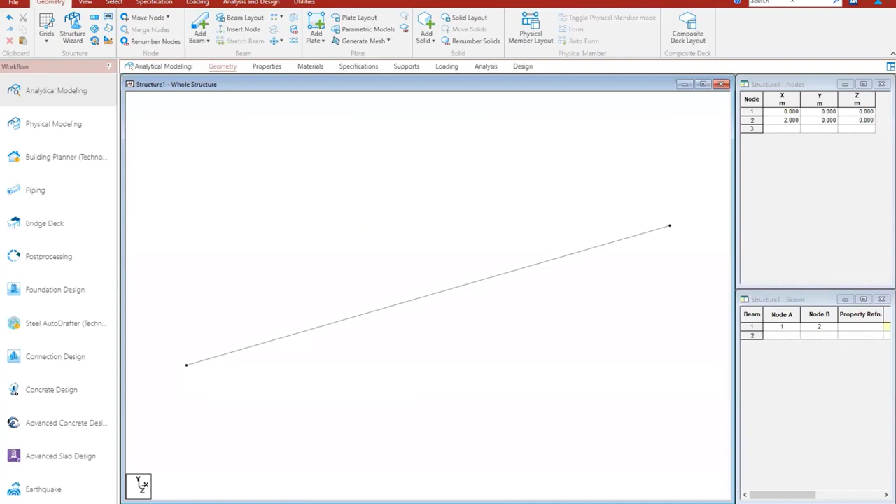Once you have the nodes, then you can add a beam. It's quite interactive. Just hover through it, find out what exactly are the functions available. You should be able to do most of the things just by seeing. If not, there is also a help section available and you can use that. So I added a beam. My geometry is almost done. I don't need anything more here. It's just a beam design. One thing I wanted to do with STAAD Editor is make it plane because I'm not working in 3-dimensional.

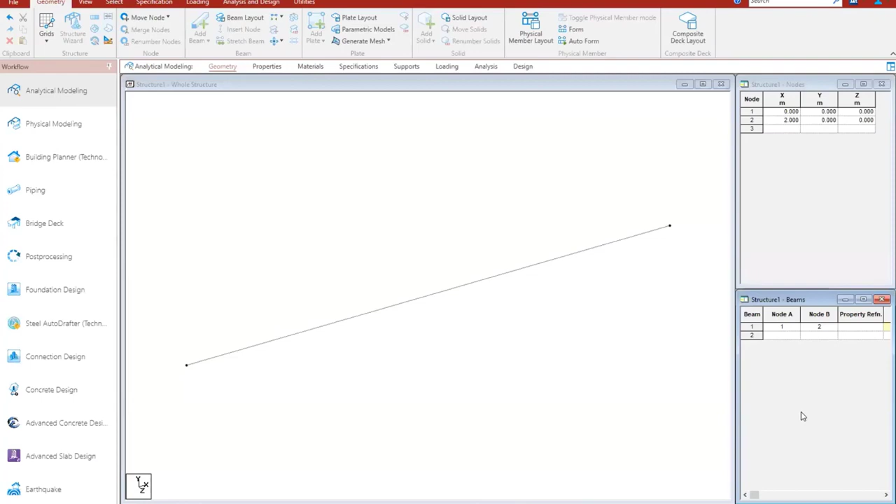Okay, then I go to the properties. Properties, I can take the section database. Say I take a British section UC beam. I'll take the bigger one for now. I can pick the material from here. Okay, so I'm defining the beam section. You can also view the table. It's opening on my other screen, I'll drag it here. You have all the properties available. You can pick from here.

Obviously you have a little bit of concept design with you. If so, you can pick from there. You can pick what kind of B by D you are looking at, and depending on that you can pick the section. I'm just picking one random section and add and close.

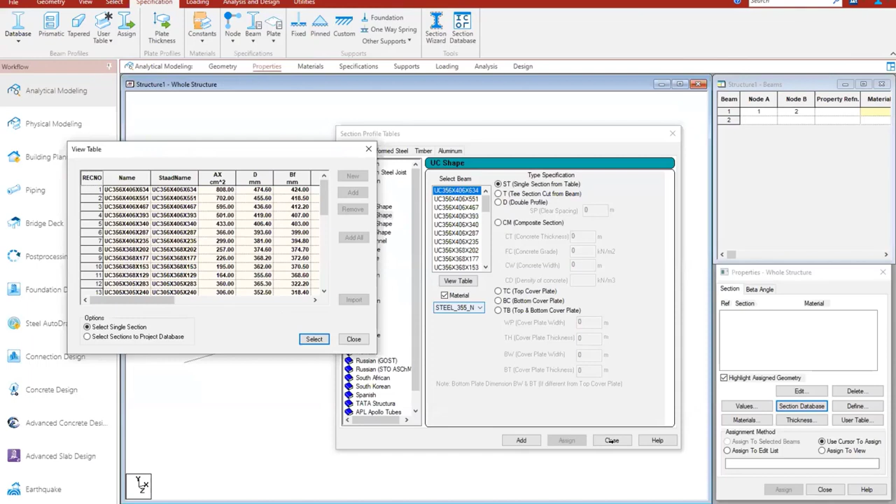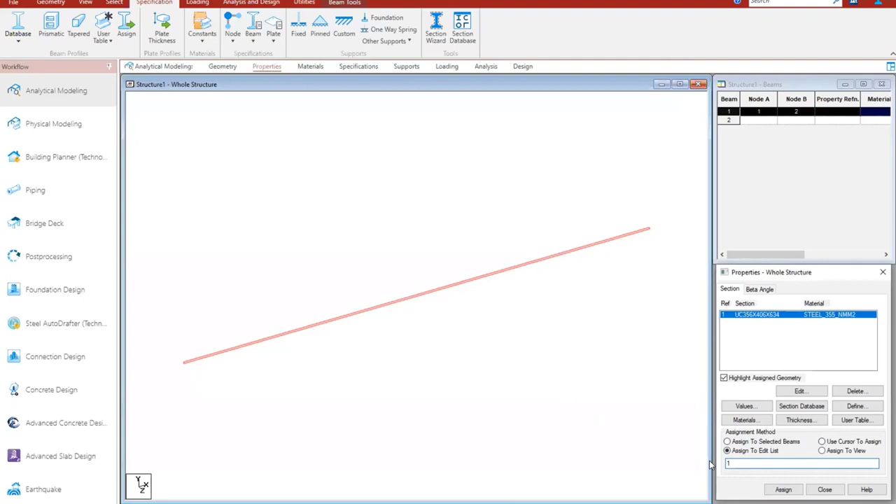Once I pick the section, I have to assign it. So there are a lot of options available to assign. One is assign to selected beam. So if I click here, simple click, it selects the beam. I can assign it to the selected beam. That is one way, or I can use the cursor to assign. Or to edit list, obviously this is beam number 1. I can just write 1 and enter and it will assign. Or I can assign it to view simply. I'll go with assign to selected beams. Yes. So properties is done.

Materials, we saw the materials coming there. If you want to edit or add some other material in it, you can do that. One thing to know is, although STAAD does allow for wood, it has this wood option here somewhere if I'm not wrong, but you cannot do design of wood using STAAD without defining the orthotropic 2D properties, because it doesn't consider wood as an isotropic material essentially.

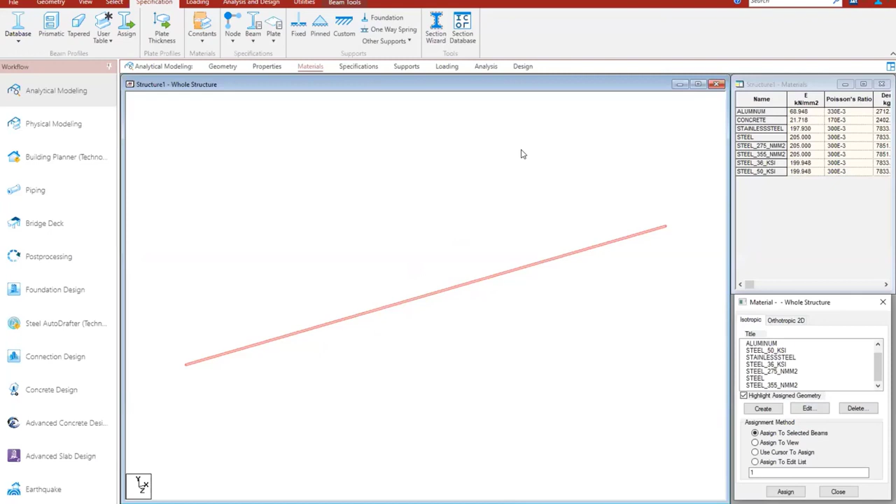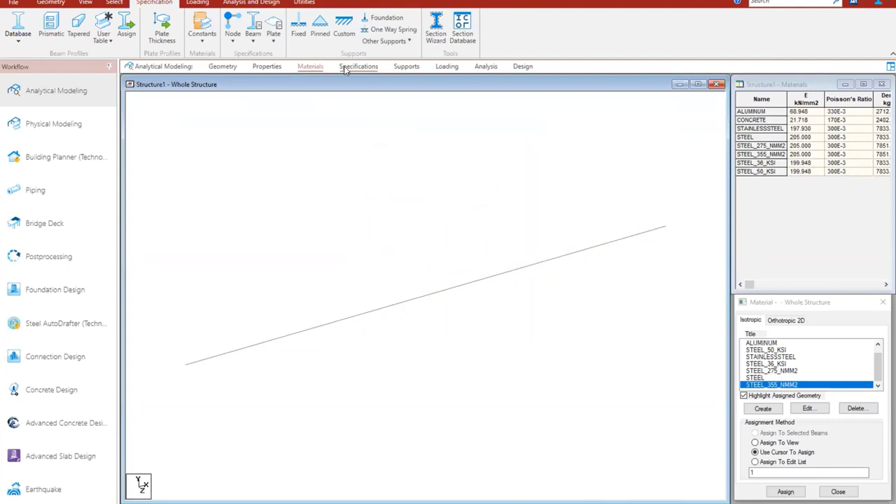Once you define the materials, you go to specification. Specification, if you see the beam specification, there are a lot of things that you can define in this. You can release the start or end of a beam. That is the most common operation you'll use. I'm not using it right now. You can offset it.

You can make one element inactive. You can release, and what else, tension member. If you have some member which you just want to behave in tension and nothing else, say you have a cable kind of a thing, or you have a plate kind of thing which you want to behave only in tension, then you use this property.

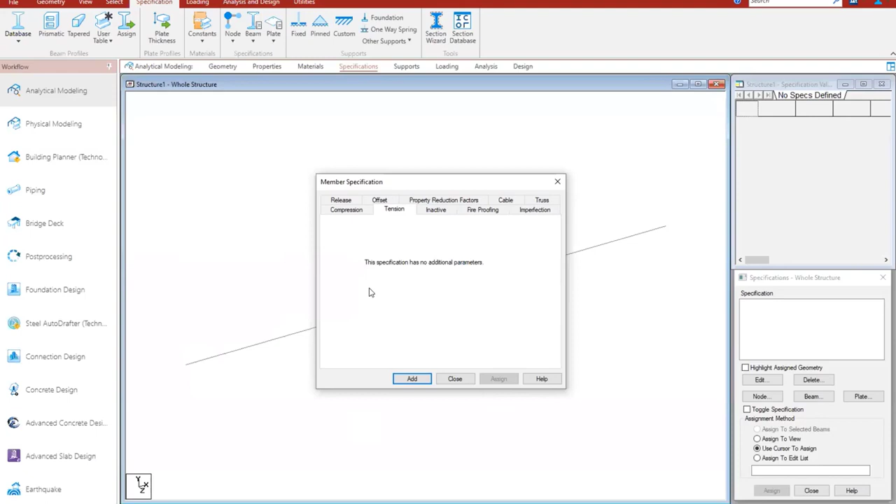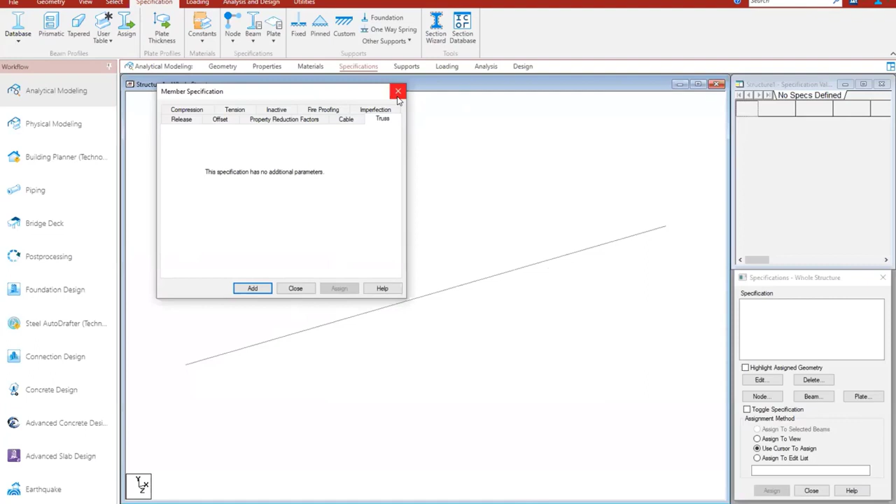You have truss element. One way of using a truss is giving releases, the other is giving it as a truss, so it understands that it's just an axial force that it can take, and it will not take the moment from the connection. Okay, so I don't want to add anything, I'll just let it be. This is a little too advanced for now, we'll drop this. So these are the specifications.

Then you go to the supports. Supports are again very intuitive, very easy to understand. There are only two nodes here. You can give supports only at nodes. There is no other way of giving support; you can give it to plate actually, but yeah. So these are the options available. Majorly, you can give it only at the nodes. So you have fixed support or a pin support or fixed but.

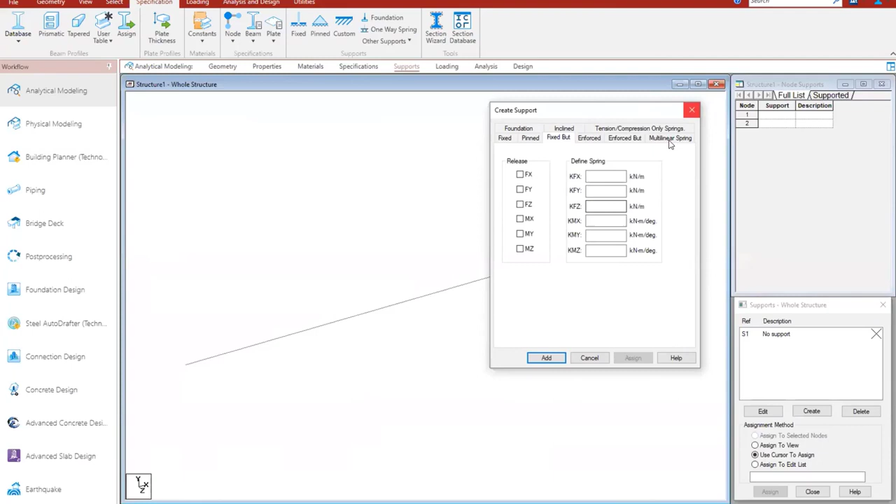So if you have some kind of spring defined, you can just use KFX and KMX values and define whatever spring you want. Same goes with the multilinear spring. If you have some kind of pile going down, which has different stiffness at different length, you can define that here very easily. And there is one thing as a foundation load.

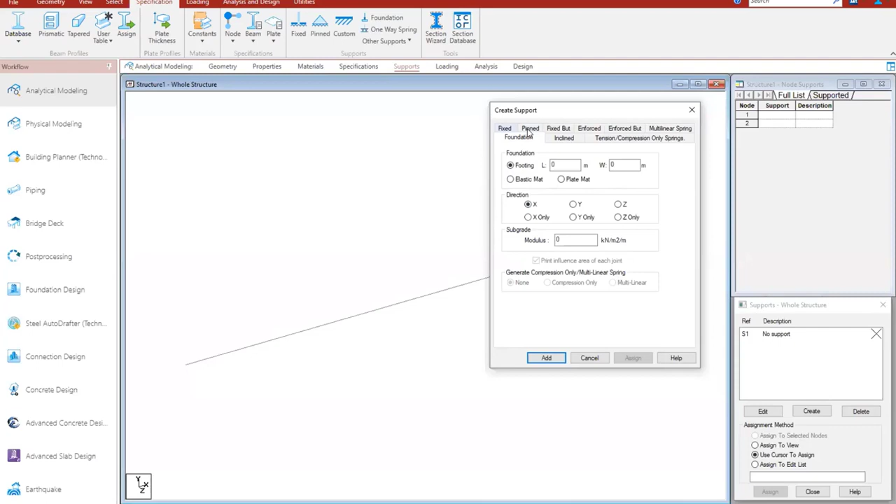So if you have a base plate or say a ground beam, in that situation you can use foundation support, where you have elastic mat and plate mat. Depending on your situation, go to help and read through it. It's quite intuitive, and you should be able to understand that very easily. I'll not go too much into it. I'll pick a pin support simply, and I'll use cursor to assign. I'll assign it both the sides. Okay, so we did geometry, we did the properties, we did material specification, support.

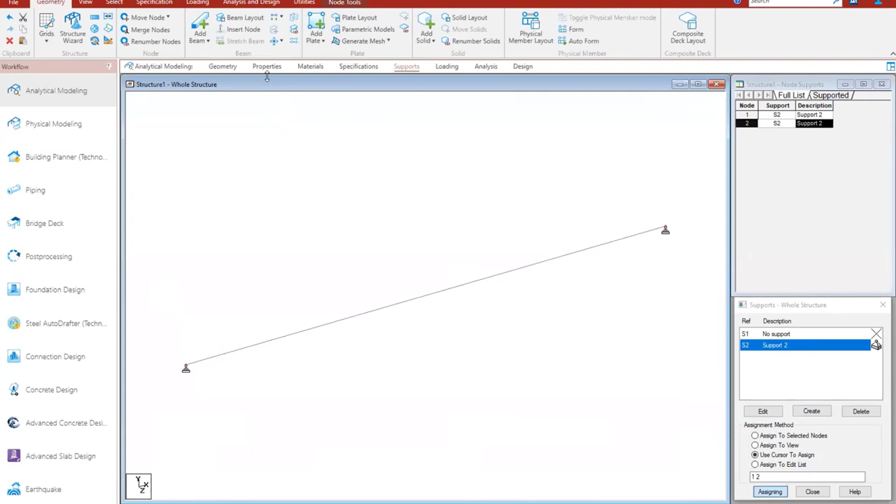In geometry, I would like to show you everything here. So you can move nodes, merge node, renumber it. There is something called circular repeat, where you can make a circular structure out of your existing one. Say you have this beam and you want to make a circle, you can make it. Another thing is translational repeat, where you can just go on repeating this at particular distances.

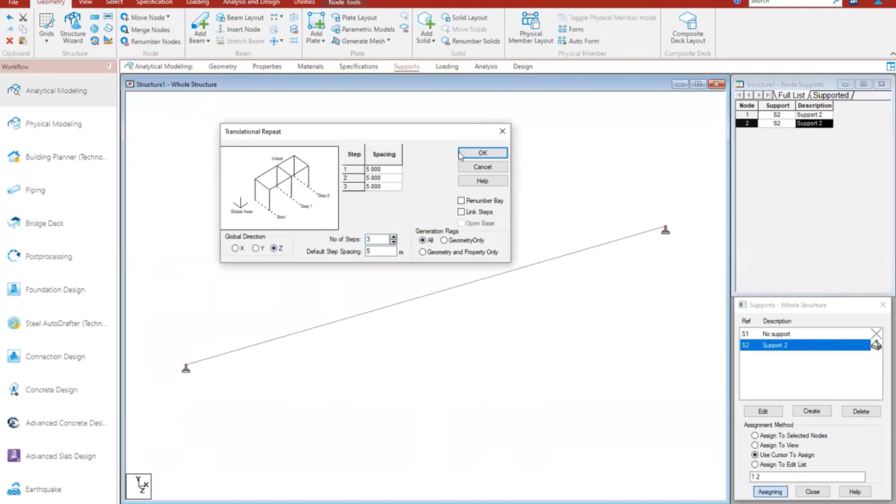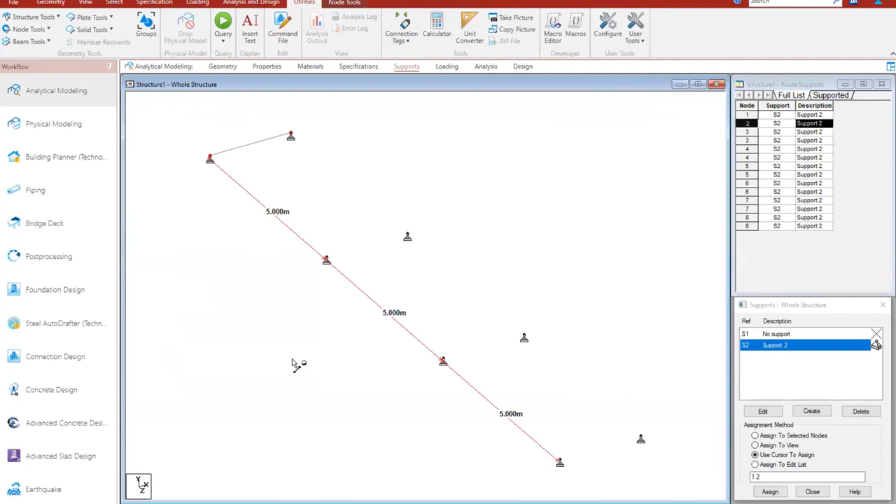If I open it, just one spacing, let me give you three spacings, 5 meters. I didn't pick the Z direction. Okay, so it just created nodes. There are utilities you have, node to node distance. This is a very important feature to know, and you can see that I gave 5 meter distance, so it copied it three times at a distance of 5 meters. I'm simply going to do Control Z to get out of it.

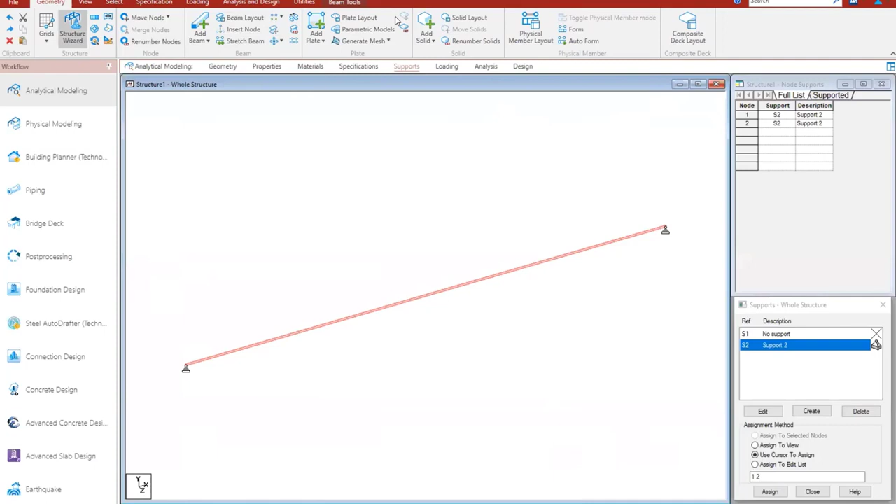Other features that you have in here are add plate, add solid, and physical member layout. This comes again from physical modeling. And in beam, you can insert a node in between, or you can stretch the beam, you can intersect the beams and all. As the complexity of the structure goes higher, all of these utilities come quite handy.

Then we go to the loading. Loading is again very easy. There are definitions available. The most used amongst these is the vehicle definition. So you can define what kind of vehicle and all, but I'll not go into it. It might take some more time. Okay. So load case detail, here you add

primary load, say dead load. You just add a dead load. You add load case 2, that will be your live load. Combination load, I'm saying just dead load plus live load.

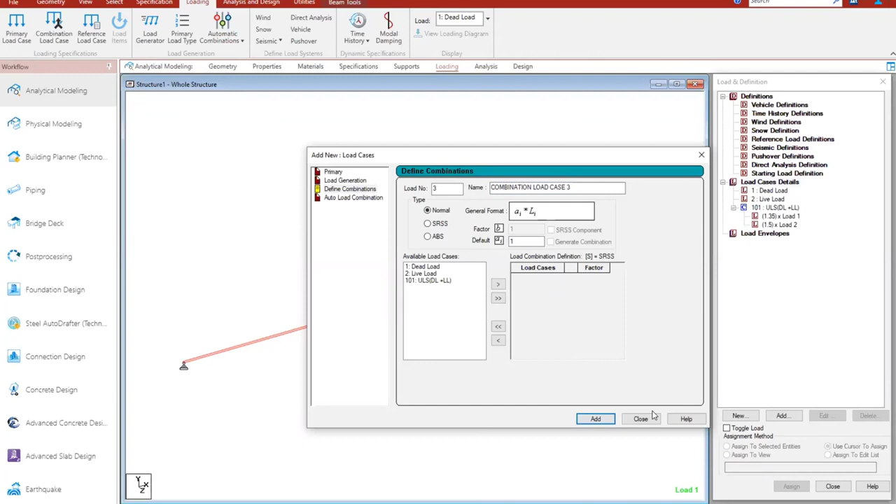These give them the factors, say 1.35, and I give live 1.5. It's a ULS combination. I give it number 101. I also define it as ULS so that I know what exactly it is, and I add it. That's it. Okay. Once you define this load here in load cases, you go to add, and that's where our window was, and we defined the load cases.

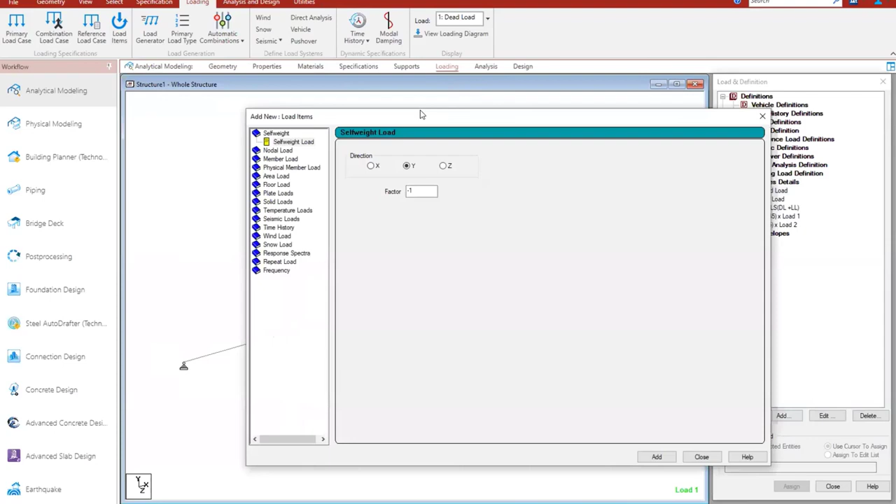In dead load, when I click add, you get a different window, and these are the types of loads that you can apply: the self weight, the nodal weight, the member load, and all. For the dead weight, I'm just using self weight with a 5% extra margin. In Y, this is the global Y. Be aware of the global and local axes while working with any software. You just assign it. The assigning is same as what we had before. So I select the member, I say assign to selected beams and finish it.

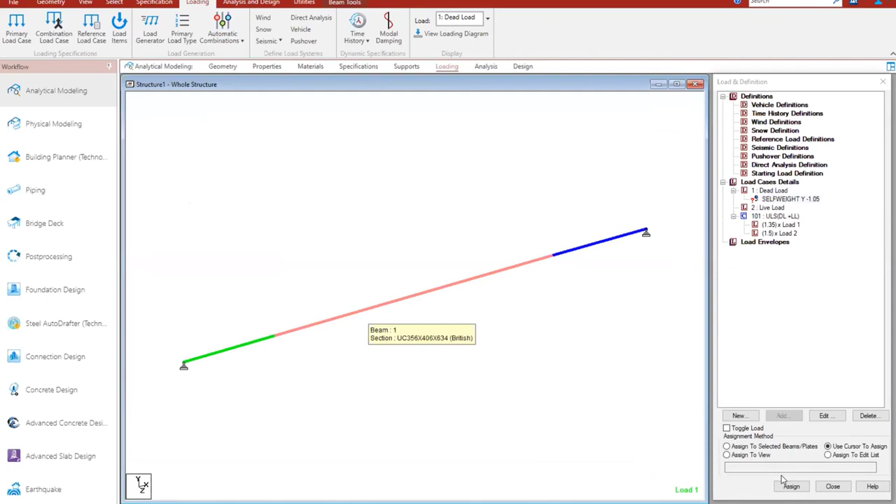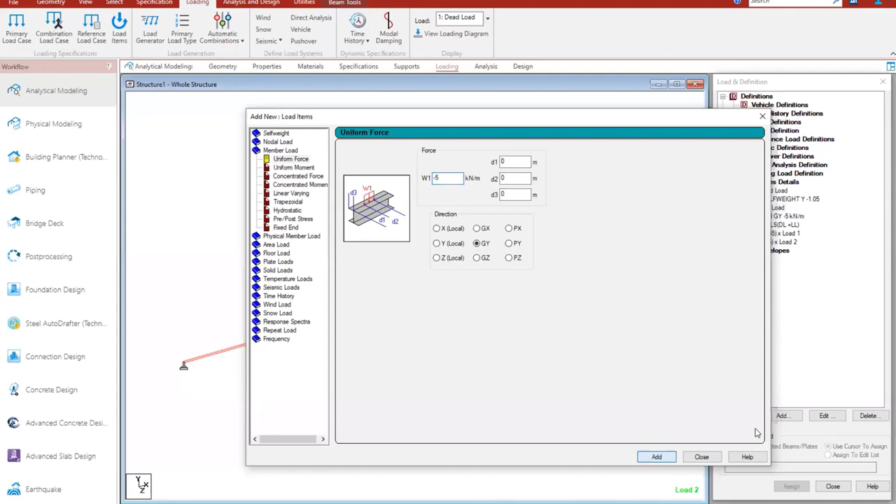Okay. And then I go to live load, similarly add. This time I'll go with a member load. I'll say I have -5 global Y. If you have local, this is local, and if you have projected, this is also available. And you also have D1, D2, D3 kind of things, which you can just pick from here and apply. Okay. And you add and close, and you apply it again to the selected beams.

Once you are there, you go to analysis and design. You give analysis command, define command, print, see, perform analysis. Once you see this perform analysis here, you run analysis. There is also one feature that gives you design of this steel, but I'll skip it for now.

It runs, there is no problem, there are no warnings. If there are warnings, please look into it. Any warning suggesting instability, do not ignore it. Any warning suggesting some other thing, look out for it. Find it. If it's something you can ignore, fine, but be very cautious about the warning part. STAAD, even if it's an unstable structure, does the analysis and gives you the results, and you will not know that it's failing.

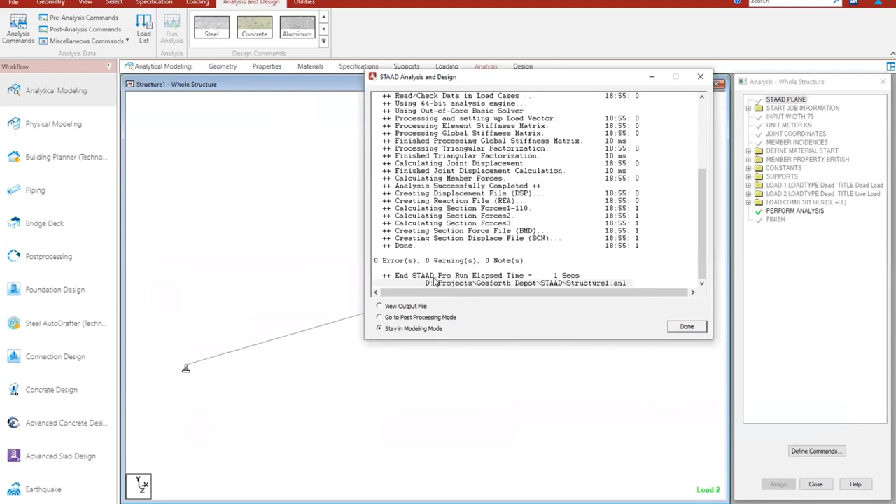Okay, so once you finish this, you go to post processing. And here you can see the displacement of the structure, the deflection diagram, the utilization ratio. Obviously, it will not show because we haven't defined any parameters for design. And then you can see it here. We can see the reactions here. For the live load, the reaction is 5 kilonewton and 5 kilonewton.

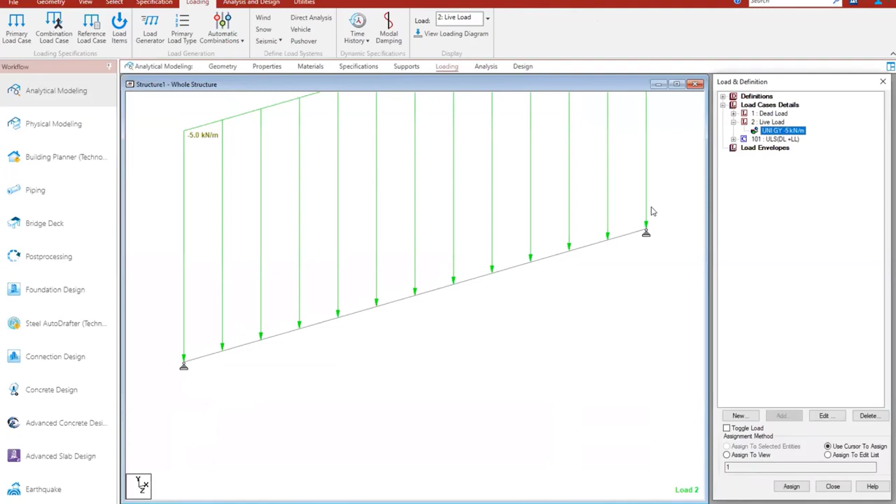The live load is a good parameter to judge because you know what kind of loads you applied. We applied 5 kilonewton per meter on a 2-meter long beam. Obviously, the total load is 10 kilonewton. And when you see the reaction, it is 5 kilonewton and 5 kilonewton for the 10. And that means your structure is behaving fine. So do have a sanity check on the structure. However good the software is, you need to understand this.

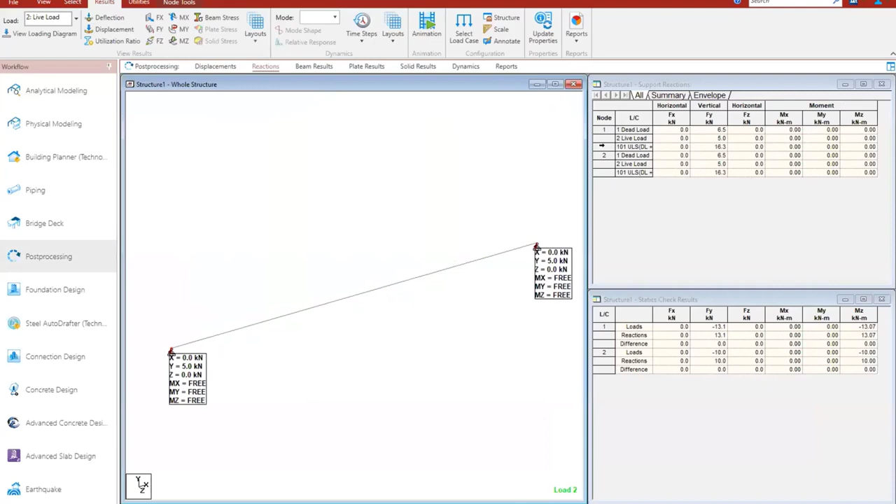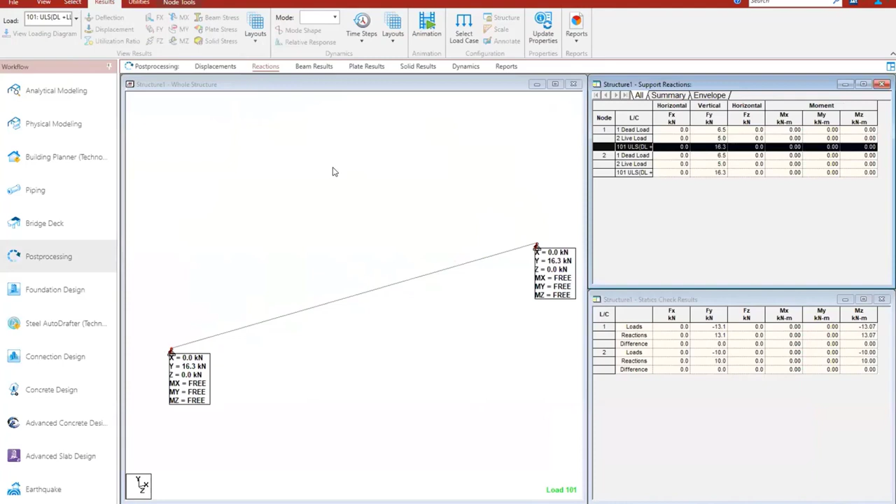And then you can see the combined reactions. If you want, you can just go here, combination there. This will give you the combined reaction. There are a lot of features in the software. In the interest of time, I'm gonna stop here. But do look into this results setup thing. It gives you a lot of options on what exactly you want to see, what you don't want to see, what kind of tables you want to generate.

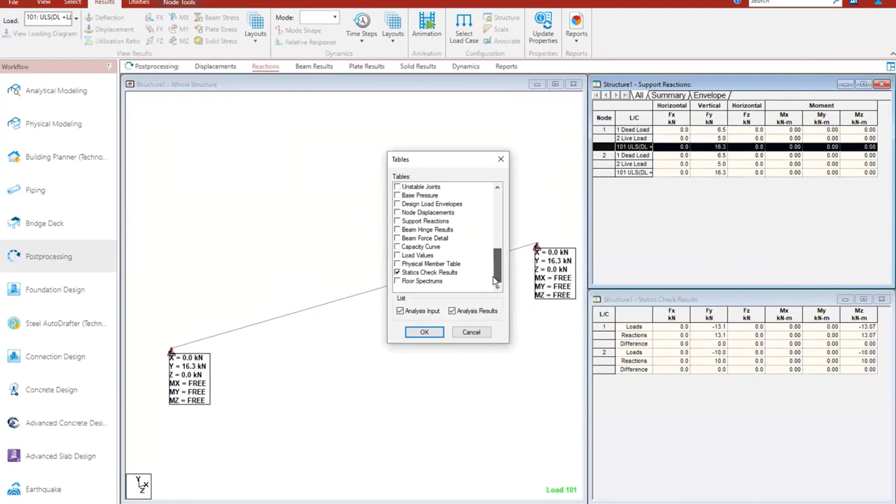You just have to right click on this. You get this results setup. You also get other tables which are quite handy and useful if you want to post process this data generated by STAAD in Excel or something. Also do find out there are ways of connecting this directly into Excel. There are ways where you can pull in data from Excel and pull it out using very simple programming, and that is one thing which you should learn and try to implement.